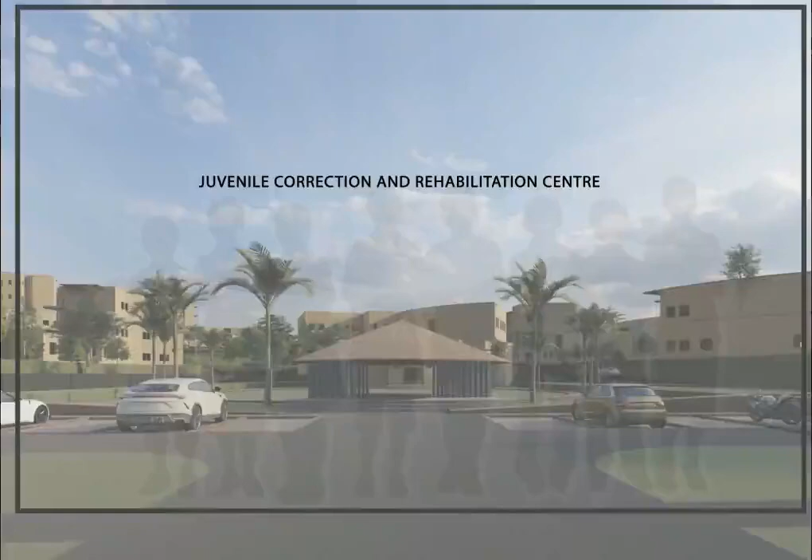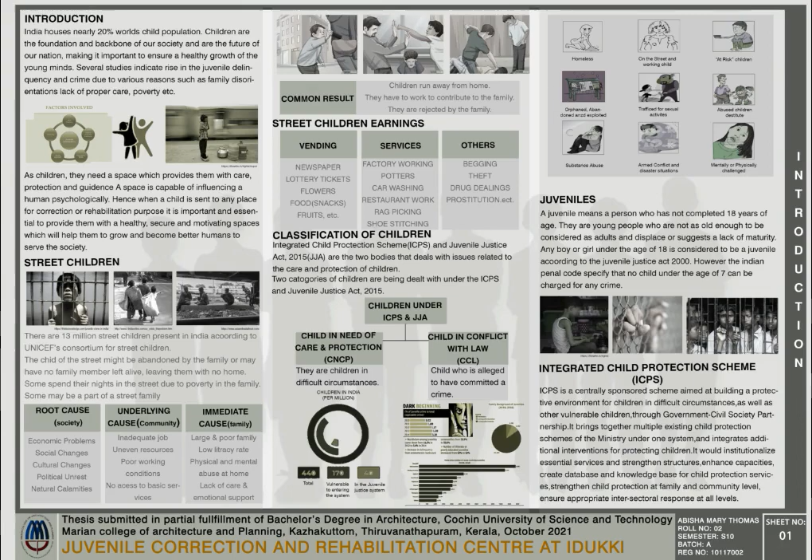India houses nearly 20% of the world child population. With respect to statistics collected from the National Crime Records Bureau, the incidence of juvenile crimes and crimes against children has been constantly increasing, due to which it is important to rehabilitate and reform children to prevent them from being potential criminals in the future.

Hi, I'm Abisha Mary Thomas, and my thesis topic is Juvenile Correction and Rehabilitation Center.

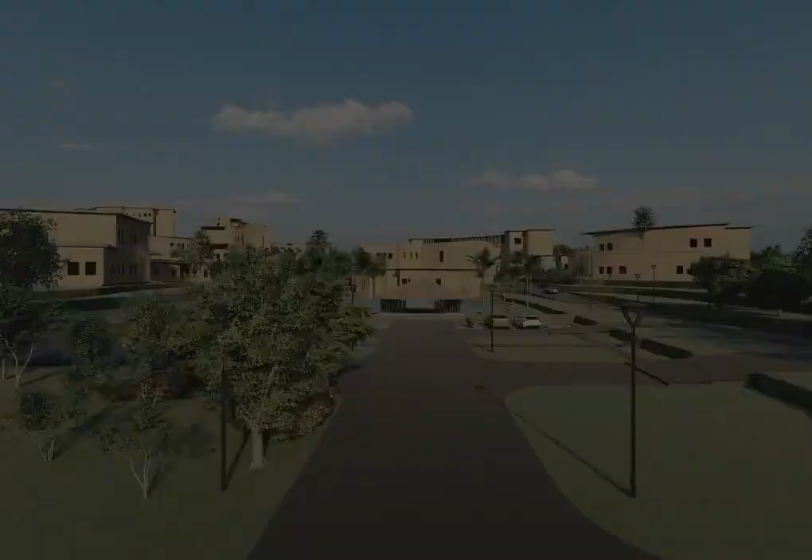As part of my thesis program, I have chosen a site at Idukki which is already a government proposal for the juveniles. Idukki is the only district in Kerala which doesn't provide a juvenile care center in the state. The only center that provides facilities for girls is in Kozhikode. Therefore, I have been planning an inclusive campus for both girls and boys.

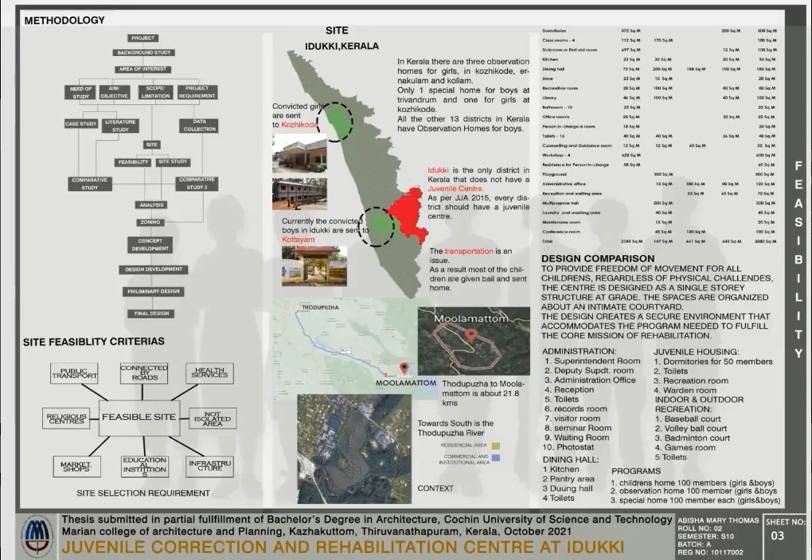The site is located at Moolamattom, Idukki. It is a 16.4-acre land situated north of the Thodupuzha River.

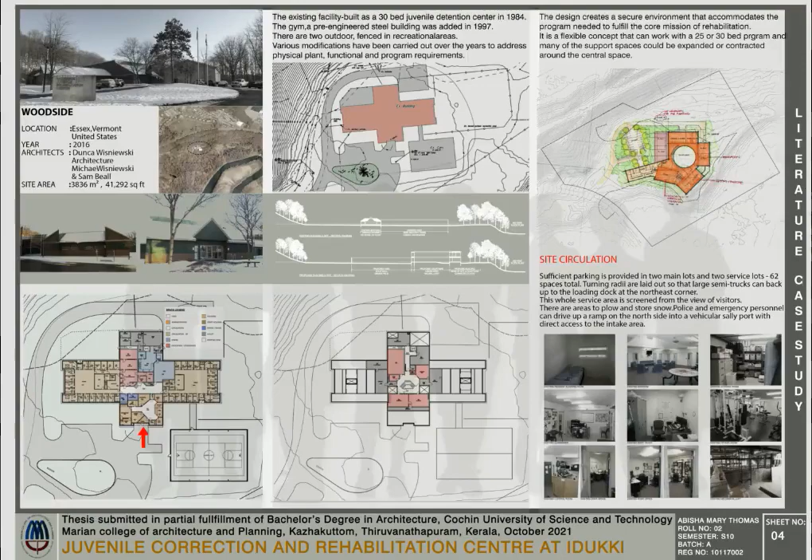My first literature study was on Woodside, a juvenile center in the US. It is a 30-bed juvenile detention center. The initial planning consisted of an entrance followed by accommodation and academic spaces on top, which was very disturbing to day-to-day activities. The new plan instead focuses on a central courtyard along with recreational activities with maximum visual connectivity. The zoning was changed so the ground floor holds academics and the first floor accommodation.

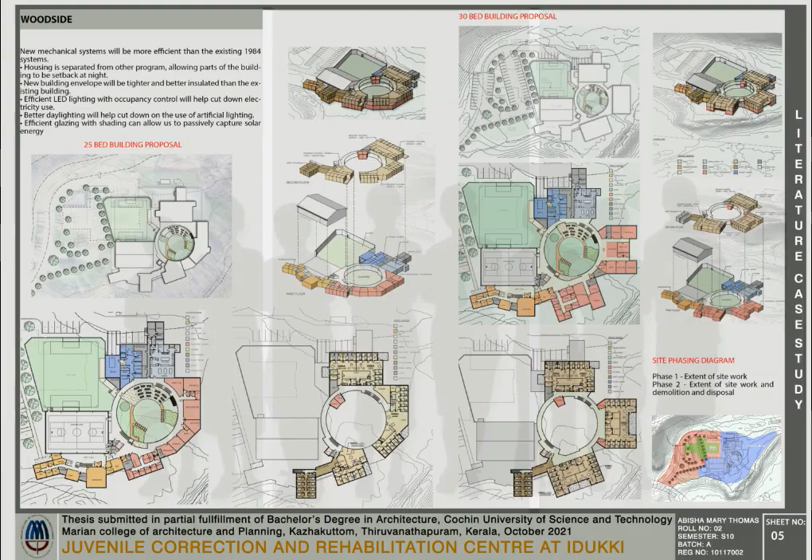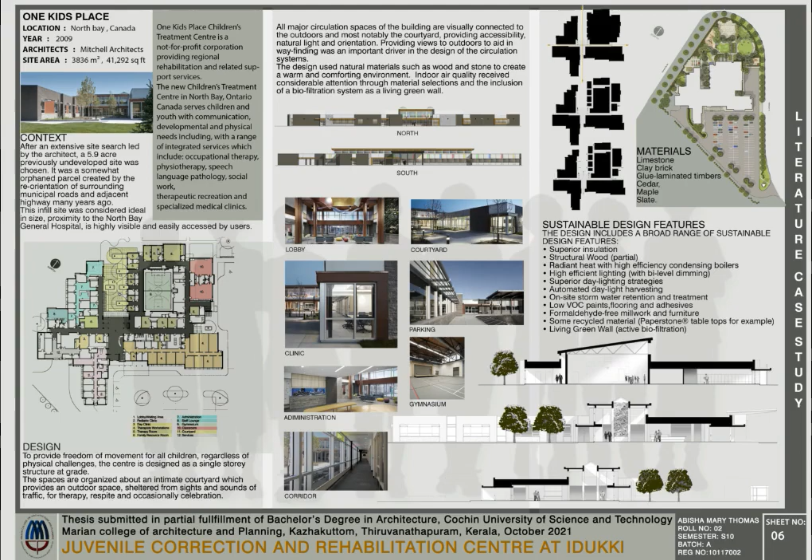My second literature study was on One Kid's Place, North Bay, Canada. They had a more inclusive outlook towards the design, more of a counseling and rehabilitation space rather than a detention center. They used glass, wall gardens, open spaces, and play of light and shadows to help enhance the child's psychology. They were also keen on making their structures sustainable.

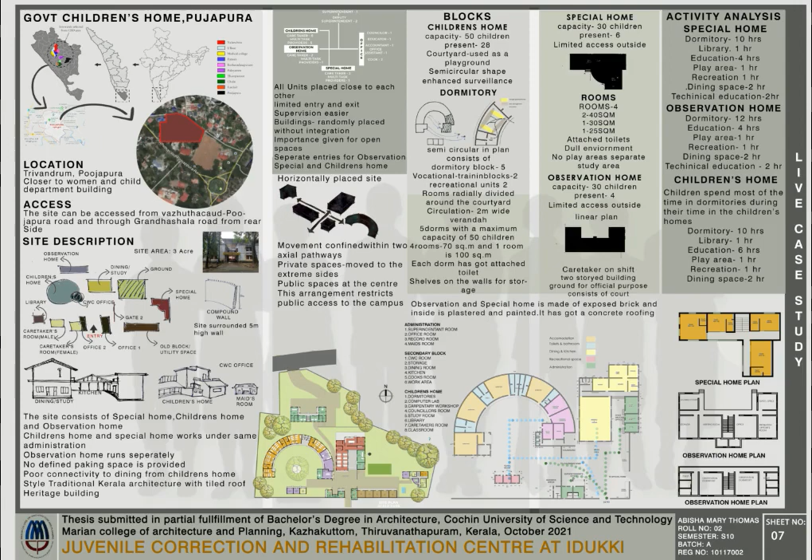For my live case study, I considered Government Children's Home Trivandrum and Thrissur. At Trivandrum, it consists of Special Home, Observation Home, Children's Home and Aftercare Home. The horizontal planning of the building helped control movement within the campus and ensure more safety for the children, as well as certain privacy and security. They focused on radial planning to ensure more surveillance.

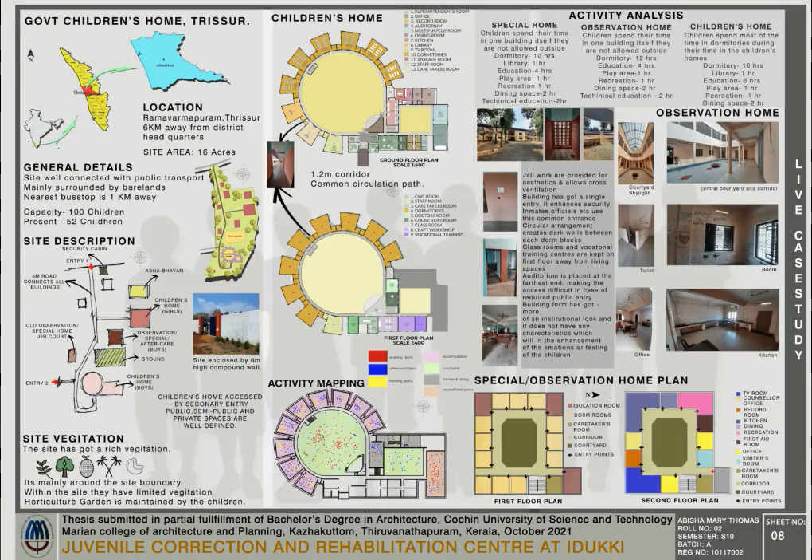Government Children's Home Thrissur is located at Ramavarmapuram, Thrissur. The site is well connected to public transportation. Here we can see that public, semi-public and private spaces are well defined. As in Trivandrum, here also they have considered radial planning for their structures.

After analyzing my case studies and literature studies, the conclusions I have arrived at are: a contoured site helps in better visual connectivity, radial arrangement helps in better security, circular movement helps in visual contact and security, low-rise buildings are preferred by users, all basic amenities need to be provided, playgrounds need to be given, and counseling, therapy and other activities must be given importance.

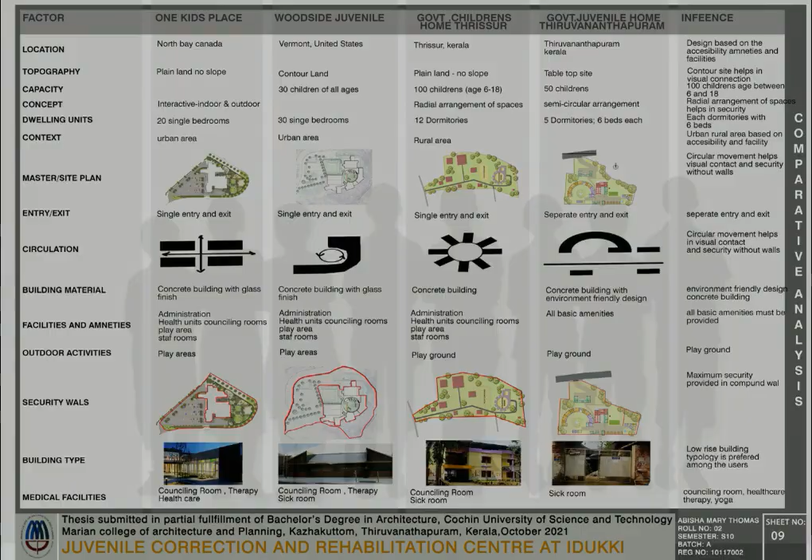The proposed site is at Moolamattom, a 16.3-acre land proposed by the government for a similar purpose. The site is located at a calm and quiet place north of the Thodupuzha River, surrounded by temples, churches, schools, hospitals and residential areas, which makes the site more adaptive to the rehabilitation process.

The site has a gradual decrease of 1 meter towards the south, and the site edges are rubber plantations and other trees, which gives the space more privacy and also acts as a barrier. Towards the north of the site is the main road and the only access to it. The south side faces the river, and the site is a contoured land with a maximum of 15 meters height from the road level.

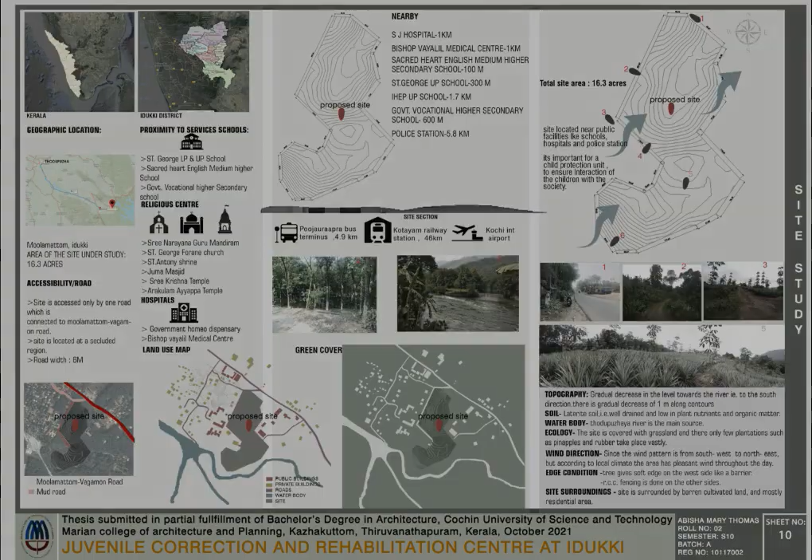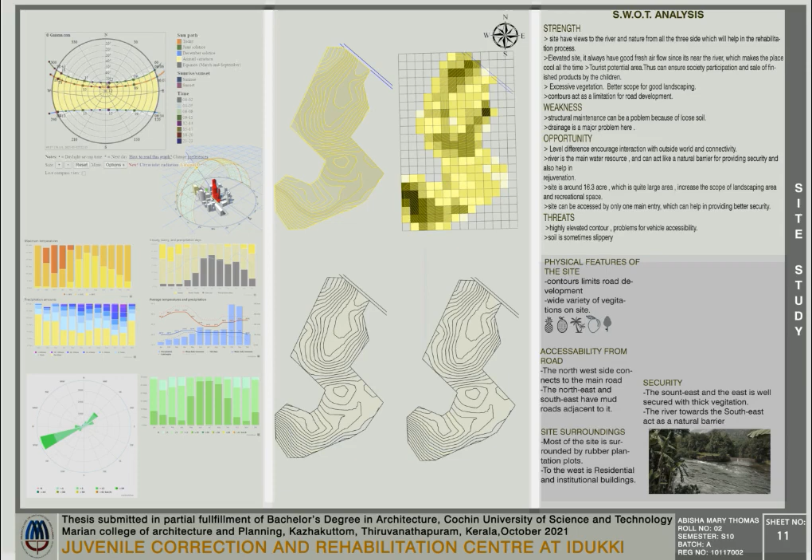The slope analysis shows the highest and lowest points of the site and helps to understand its terrain. The natural valley created by the site can be used efficiently.

Healing through the process of rehabilitation is very important. Hence, I've taken my special topic on healing gardens. These are effective if they foster elements like sense of control, social support, physical movement and exercise, access to nature and other positive distractions.

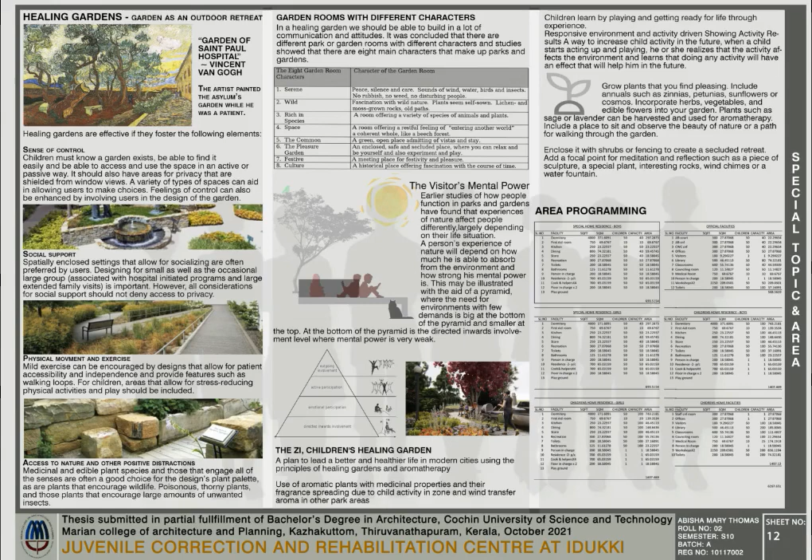Children learn by playing. Responsive environments and activity-driven spaces showing activity results increase child activity in the future. When a child starts acting up and playing, he or she realizes that each and every activity affects the environment and learns that doing anything will have an effect on them, which will help them in the future. This understanding will help them build better judgment about life and also help to regain their self-esteem.

The basic concept of the project is defensible space theory, proposed by Oscar Newman. The traditional explanation of crime falls into two categories: nature versus nurture. The nature theory stresses the biological and hereditary aspects of the individual, while the nurture theory stresses the upbringing, surroundings, and education of the person.

Further studies lead to the opportunity theory, which points out various aspects that influence crime, as shown in the chart. I am focusing on the very first part of the chart, that is, the offender itself.

Defensible space theory focuses mainly on territoriality, natural surveillance, and imageability. Territoriality brings a sense of belonging, natural surveillance enables easier security, and imageability is the overall ambience of the space - it is the definition of that space itself.

The site is divided into two: a higher security region and a lower security region. The main difference between special home and children's home needs to be considered here. Special home, observation home, and aftercare home are taken care of by the Juvenile Justice Board, or JJB.

The special home consists of children who are sentenced after a crime. Observation home is for children who are under trial and yet to be proven guilty. Aftercare is for children who have been sentenced but turned 18 after being sentenced.

Separate isolation cells are also incorporated for difficult-to-handle children who have committed heinous crimes and find it difficult to be amongst others. While these are kids who are in conflict with law, the children's home children are the ones who are in need of care and protection.

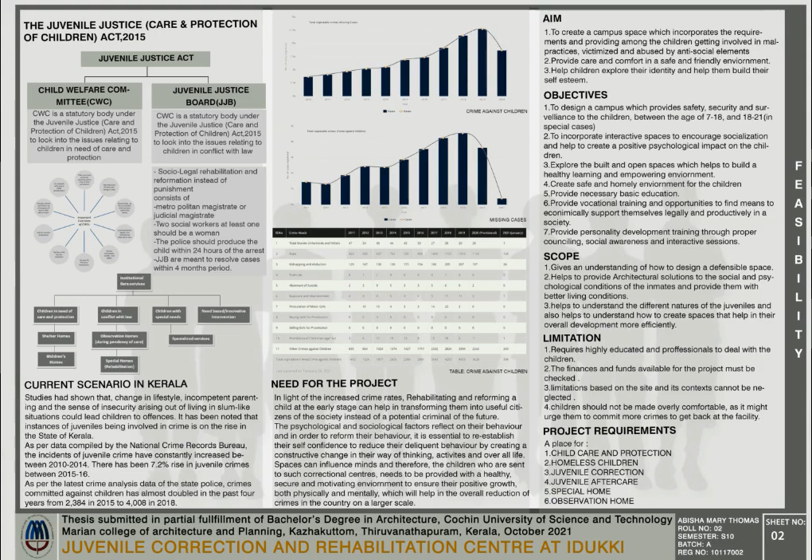These kids are taken care of by the Child Welfare Committee. They are children who have fallen under circumstances or are victims of crimes themselves. They need protection but require less confinement, whereas the CCL kids need confinement and constant surveillance.

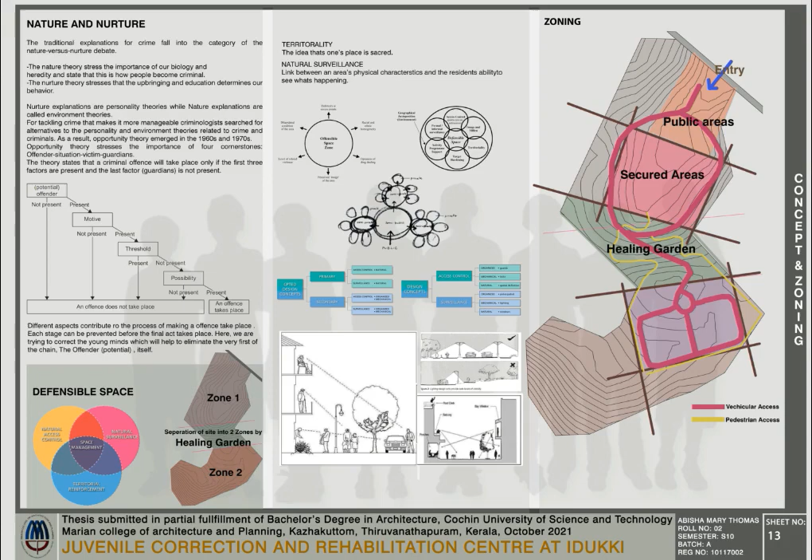Considering these factors along with the site contour and the concept, I have done my zoning.

The site is accessed through the Thodupuzha Moolamattom road towards the north of the site, which is the only entrance point to the site. The site is entered after the security check at the entrance gate, followed by the guest and staff parking.

The entrance gazebo acts as a window which ensures visual connectivity as we enter the site. The academic block is situated opposite the entrance gazebo, across the water body.

The admin block is connected to the JJB and CWC block. This is where all the hearings and legal court meetings happen.

The special homes are located on either side of the main block. Special home is divided into three divisions.

Observation home is for children who come under trial; they usually stay for a maximum of 3 months. Special home is for children who are sentenced and can stay up to 3 years. Then comes the aftercare home, for those who are sentenced but have crossed the age of 18 after being sentenced.

And there is an isolation cell for children who are out of control and who are not ready to mingle with other students.

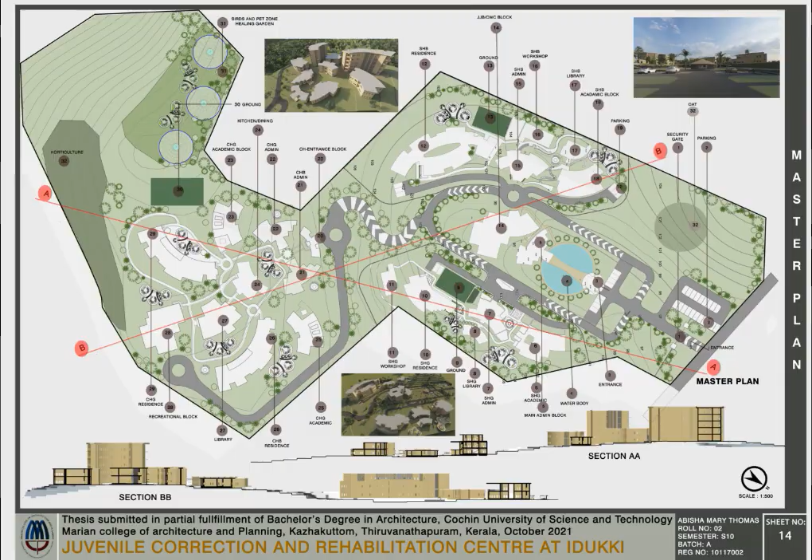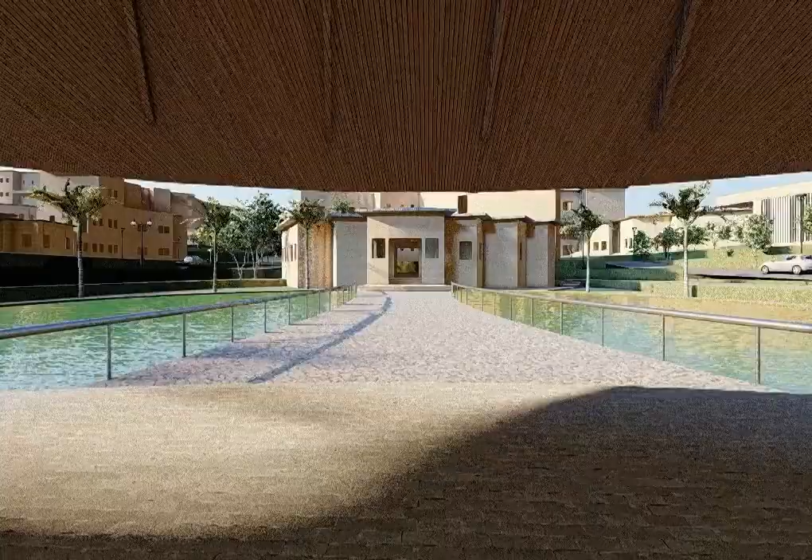The main block is entered through the gazebo where the drop-off is. It is then led to the administration block across the water body over a deck. The administration block consists of a security area, a waiting lounge, followed by a surveillance room, office, and superintendent's room.

It also consists of a general counseling room. The administration is then connected to the JJB and CWC block. It is a two-story building, entered to a central courtyard with a waiting area on either side. It consists of an office, an NGO workers room, a conference room, and the courtroom at the ground floor. The first floor is the CWC wing, which consists of a waiting area, office space, and a conference hall.

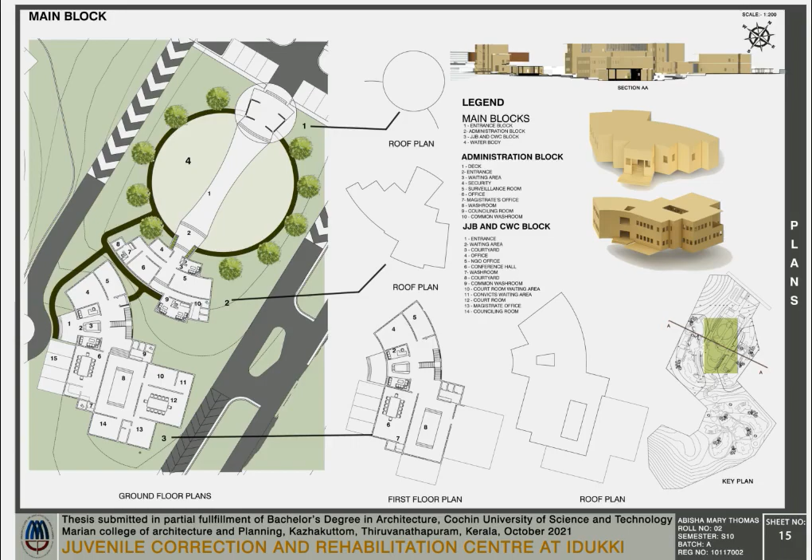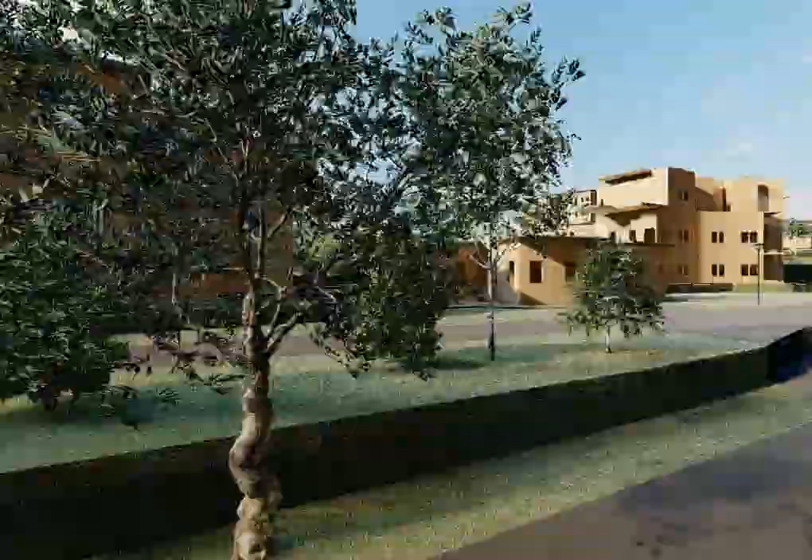The entrance of the administration block leads to a lobby. Waiting and visitors area have been provided along with a surveillance room opposite to it. It is then followed by the office space, magistrate's room, and counseling room. It is a single-story building.

The counseling room opens to the outdoor healing garden with seating facilities. It is designed so that counseling can be conducted in the open, in the garden, to reduce the mental pressure on the children and help them in the process of rehabilitation.

The waiting area also faces the healing garden at the front. Visitors can also use the garden, which helps them interact more freely, while at the same time the children can be monitored closely.

From the administration, it exits to the library block. Open decks have been provided and outdoor garden seatings are also provided.

The academic block consists of 5 classrooms, divided as per age categories. Books and study materials are kept in the classrooms itself. Music and dance rooms are also provided.

The residential block is a three-level building zoned respectively for observation, special home, and isolation cells. The ground floor consists of kitchen, dining, workspace, caretaker's room, and observation dorm 1. The first floor consists of a TV room, observation dorm, special home dorm, and a recreational activity area.

The second floor is the single rooms and cell area, for isolation purposes. Each floor is provided with caretakers for security. Special home boys have similar zoning.

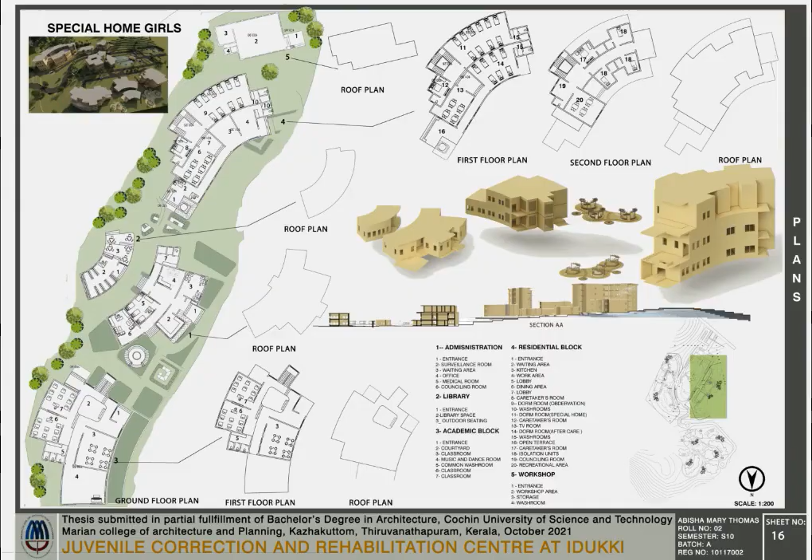We enter the admin to the surveillance room and waiting area, followed by the office, medical room, and counseling room. Here too, the garden space plays an important role in the counseling process. The admin is followed by the workshop area and then the library, which has open seating provided along with the healing garden.

The academic block enters to a courtyard space. Classrooms are given for each age group, along with dance and music rooms. A general store is provided for day-to-day things.

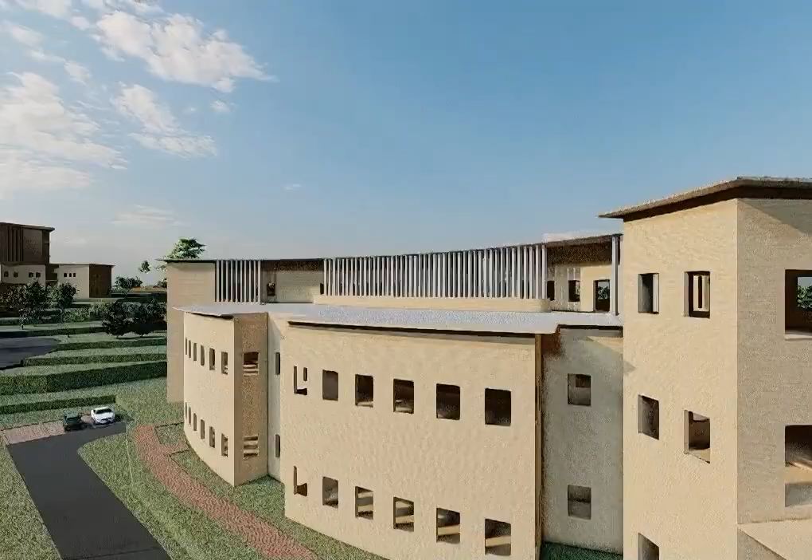The residential block is a three-story building zoned for observation, special home, and isolation cells. The ground floor consists of dormitories, caretaker's room, dining hall, and kitchen. The first floor consists of dorm rooms, laundry area, caretaker's room, and a recreational room for special home kids. The second floor is for the isolation cell, with a caretaker's room and a recreational area.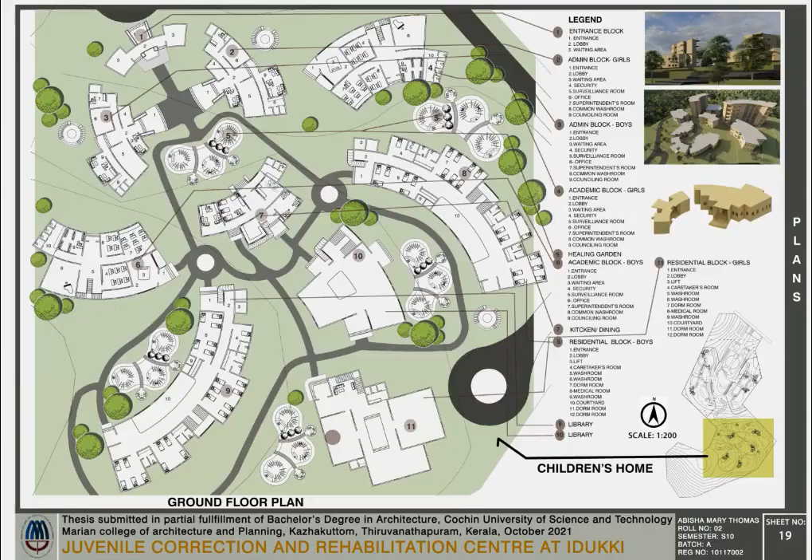The academic block is again divided as per age category and follows a similar design for girls and boys. The residential block is a five-story building consisting of dorm rooms, caretaker room, and lifts, with a central courtyard and gardens also provided. The children's home section is provided with bird parks, horticulture spaces, and open grounds for outdoor activities.